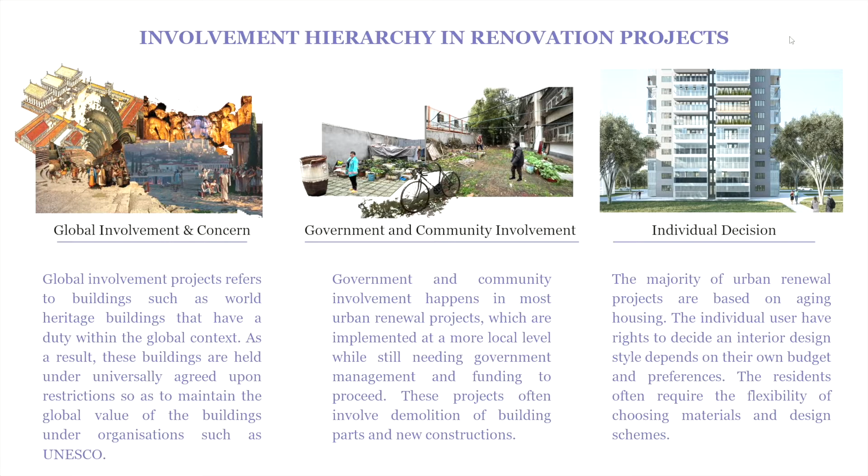This brings us to a toolkit that addresses the need of revitalizing world heritage communal spaces. These are world heritage buildings that are slowly diminishing and losing their indigenous community and cultures. In addition, the sound ambience of these world heritage communal sites is also slowly being stripped away from these buildings.

To address this, the toolkit sets out to reprogram underutilized or undervalued spaces of the building to serve as vibrant communal spaces. This is addressed through options 1, 2, and 3.

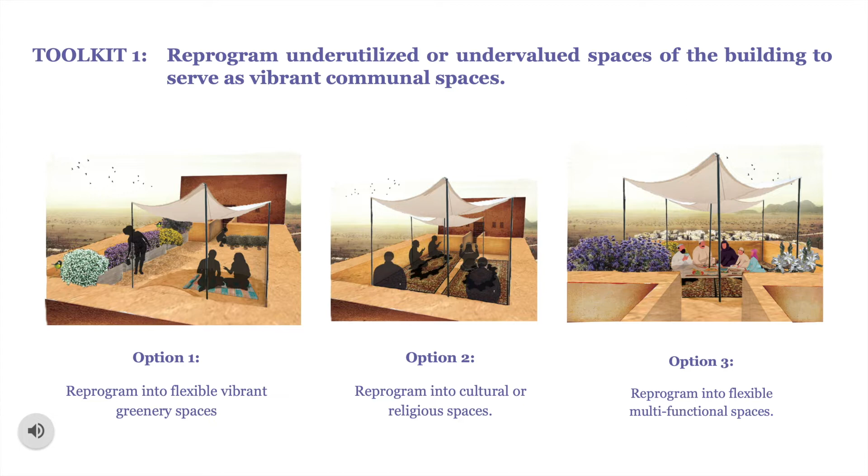In option 1, the toolkit sets out to reprogram underutilized spaces into flexible, vibrant greenery spaces in which occupants have expression of arrangement through potted gardens. This is explored through the case study of the Alwi Bin Sumayt house.

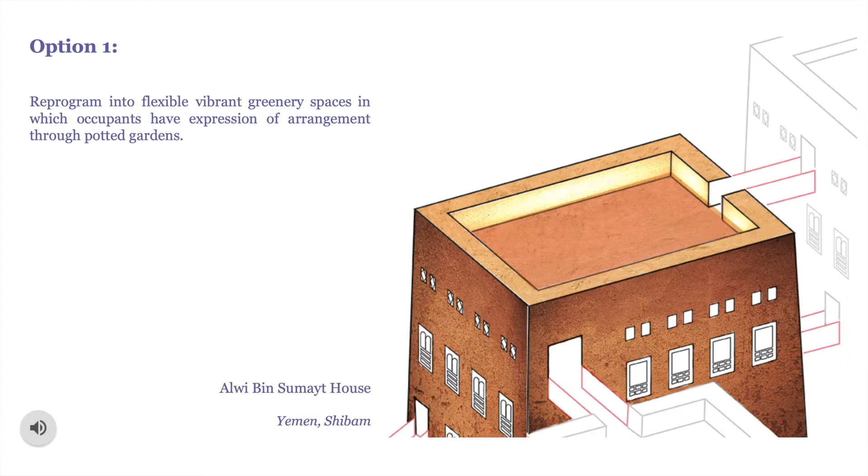The Alwi Bin Sumayt House is a walk-up residential building in an Islamic community of Shibam, a 1,700-year-old world heritage city in Yemen.

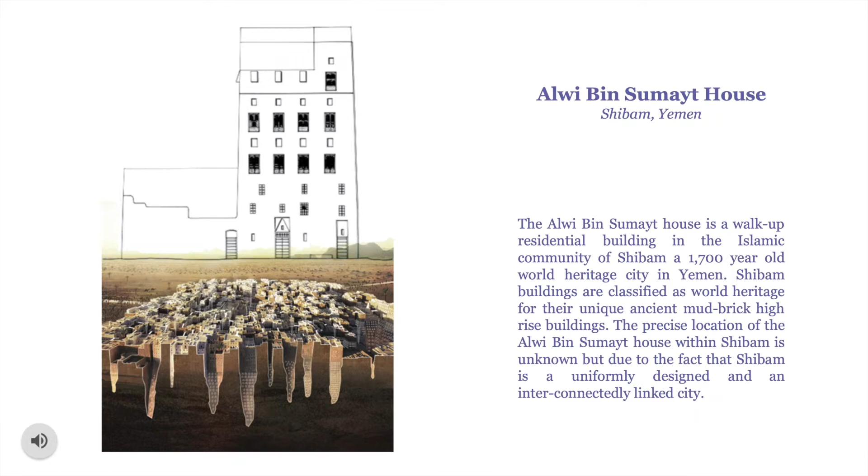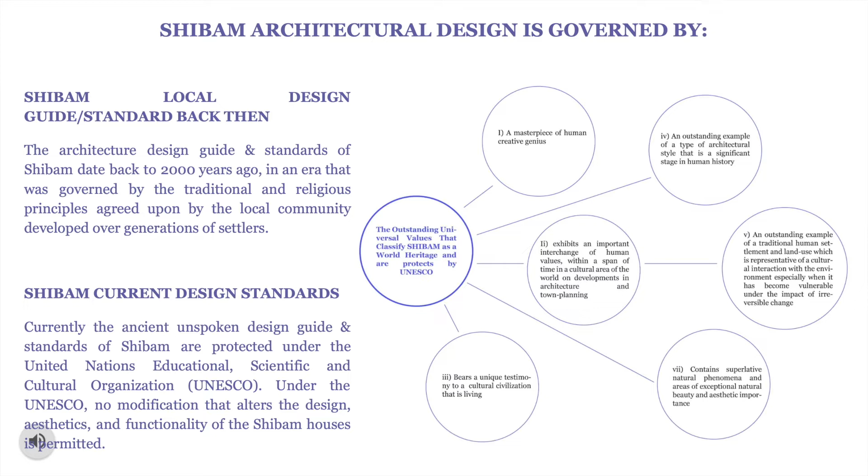The Shibam city is governed by Shibam local design guidelines that date back 2,000 years, in line with current Shibam design standards that work consistently with UNESCO to preserve the unique mud brick architecture of the buildings within Shibam. Among these is the Alwi Bin Sumayt House.

The heritage mud brick construction of the Alwi Bin Sumayt house provides good thermal behavior, good fire resistance, good soundproofing, and is built with a wider base to provide good building stability.

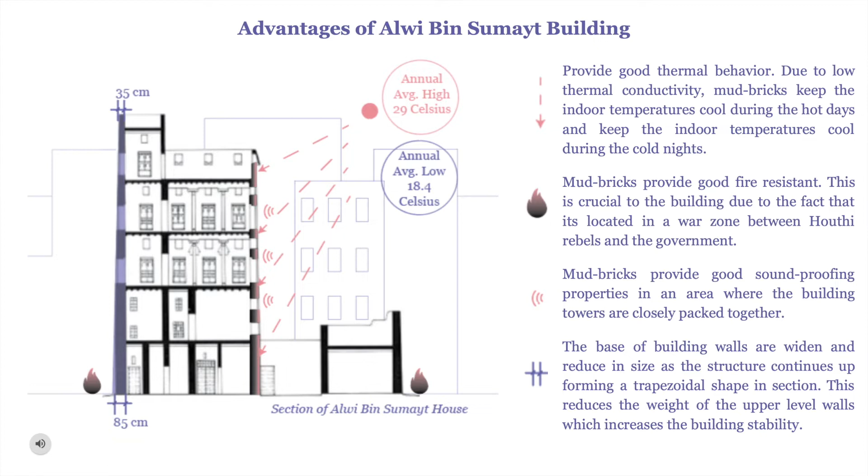The Shibam community is known for its celebrations and activities uniquely carried out on the ground with no furniture, its reliance on groundwater from the qanats surrounding the city, and its maintenance of the earthen architecture, passed on from generation to generation.

However, these have been threatened by the introduction of modern society job opportunities and modern products, such as toilets. As a result, the indigenous community is slowly neglecting the heritage cultures and values that have preserved this unique architecture and community for 1,700 years.

Hence, it's proposed that there be a preservation of the indigenous community engagements that will highlight the town's heritage value to the custodians. This is why it is proposed that this case study undertake the toolkit to revitalize the world heritage communal spaces.

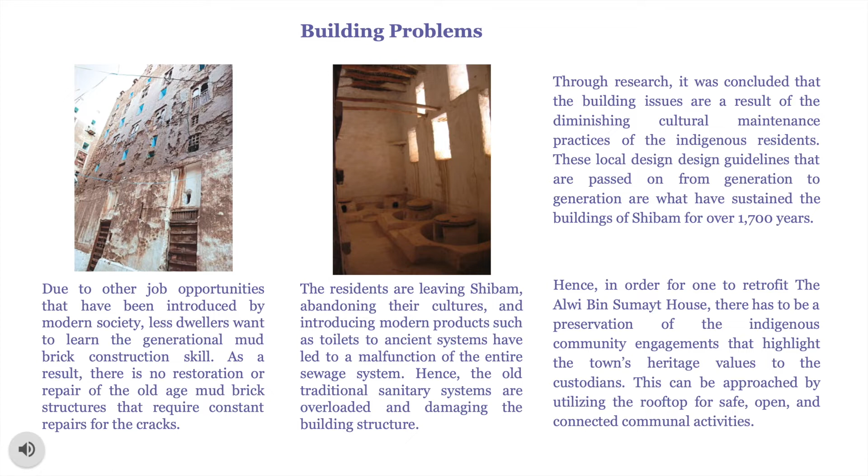To carry out option 1, reprogramming the space into flexible, vibrant greenery spaces in which occupants have expression of arrangement through potted gardens, one has to identify underutilized or undervalued spaces within or around the building.

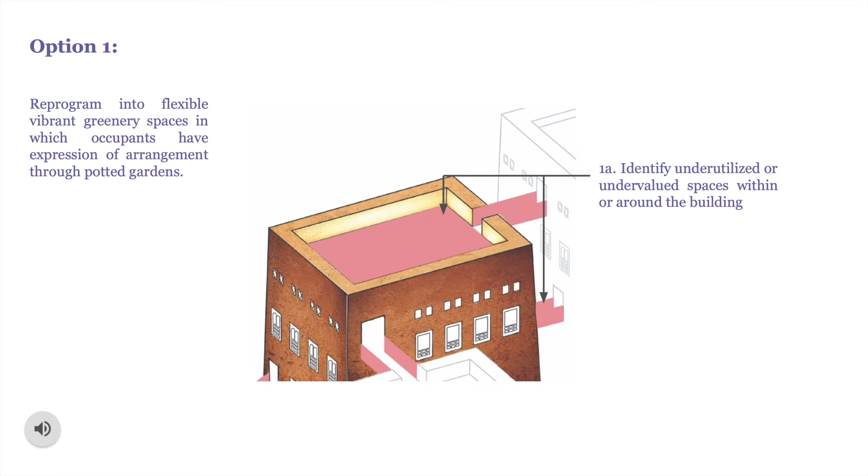Then incorporate planters that can easily be accessed and maintained within the local community. These have to be lightweight so as not to damage the heritage structures.

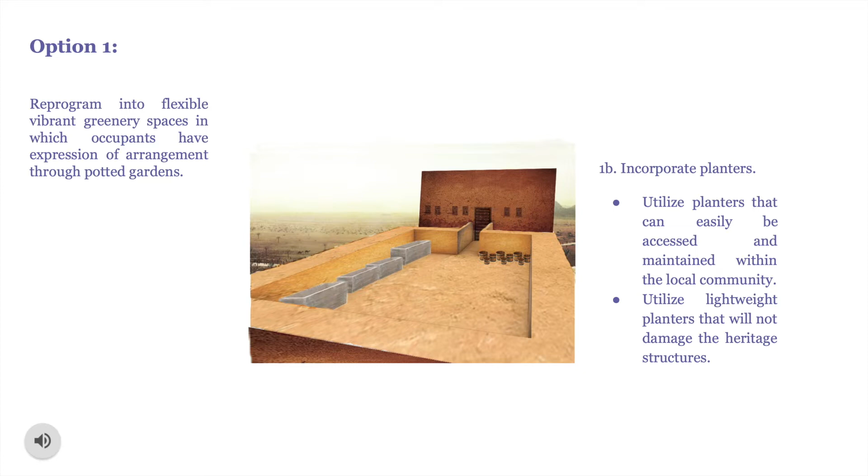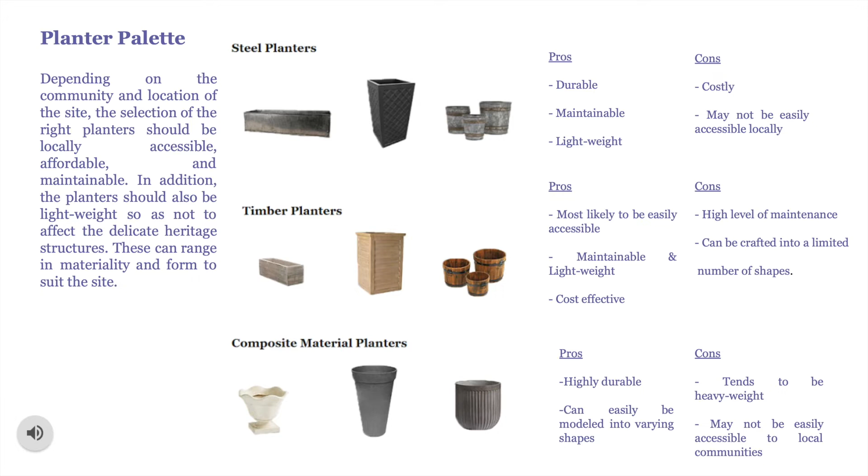The planters can range from steel, timber, to composite material planters, and these each provide their own pros and cons, which are to be carefully evaluated as to which will best suit the current heritage site.

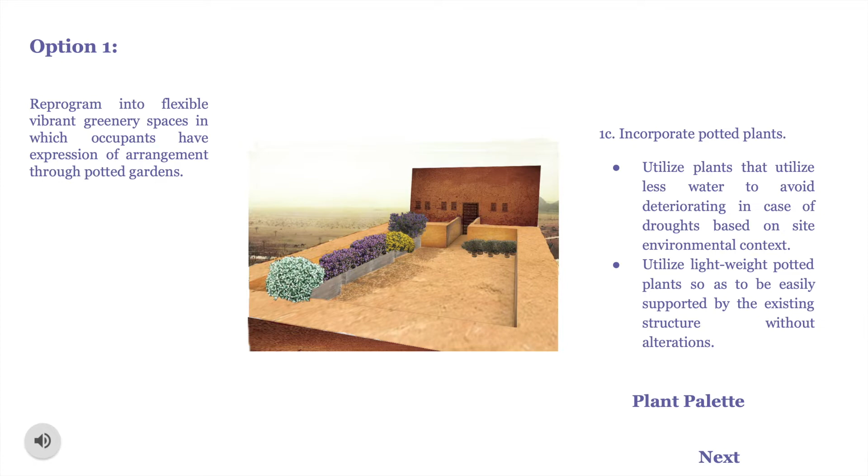Plants are then to be carefully selected to be placed in the planters. These should be lightweight so as not to damage the structure, but are to be carefully selected based on the climate in which they can easily be sustained. The plant palette ranges from dry climate plants, temperate climate plants, to tropical climate plants.

After incorporating plants, one can then select the right urban furniture that will cater to the activities that will take place in this communal site.

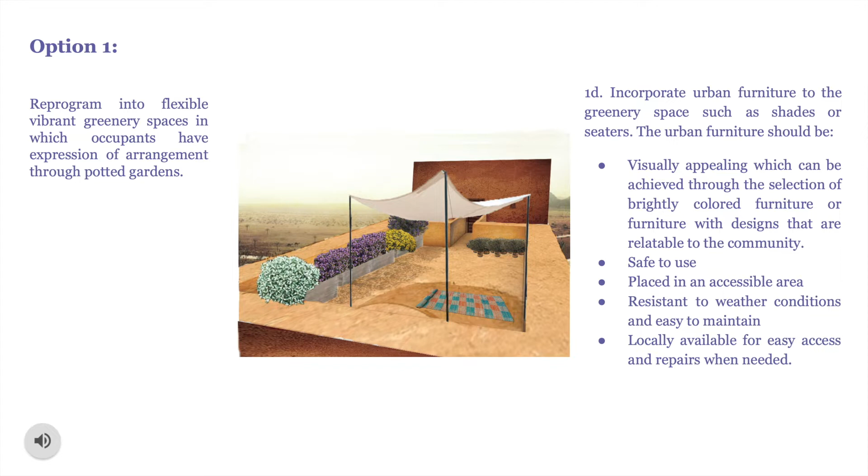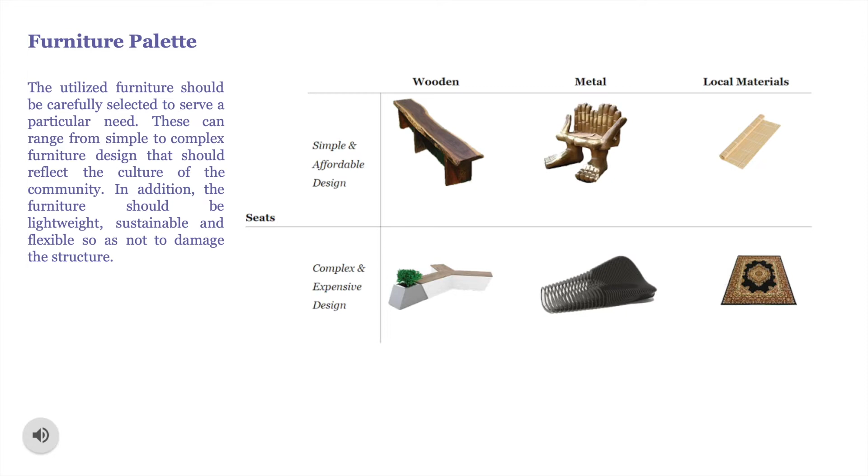The urban furniture can range in materiality and design, from simple and affordable to complex and expensive designs. This urban furniture can be seats, tables, or shades. This will transform the space into a vibrant greenery space in which occupants can enjoy a freedom of expression through potted gardens.

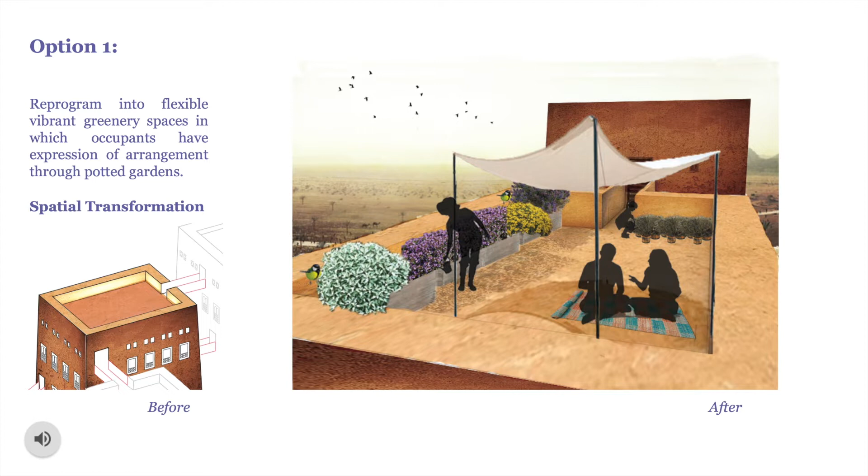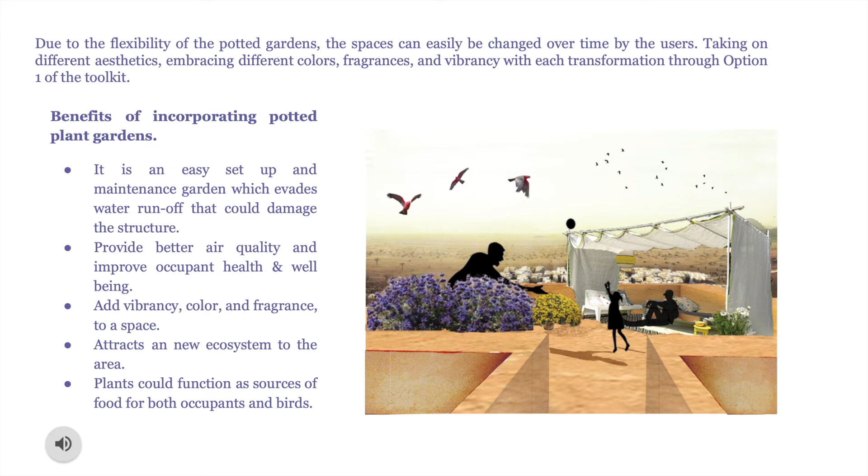The flexibility of potted gardens can enable the space to easily be changed over time, taking on different aesthetics, embracing different colors, fragrance, and vibrancy over time with each transformation.

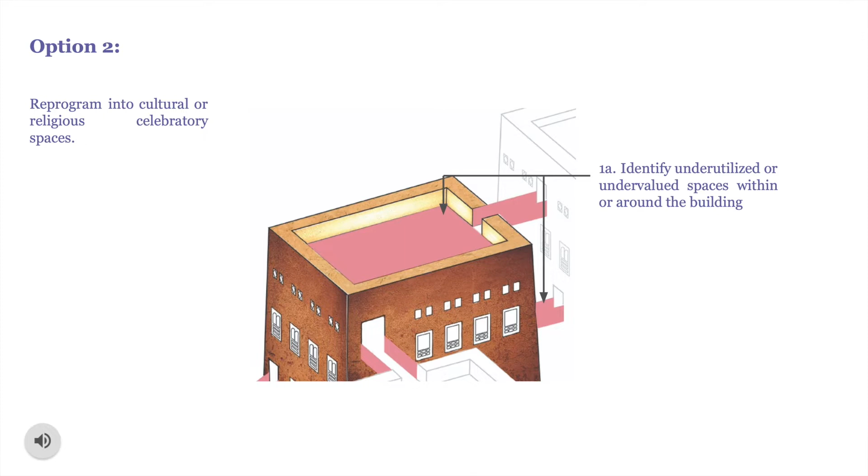Option 2 of the toolkit proposes to reprogram underutilized or undervalued spaces within or around the building into cultural or religious celebratory spaces. After identifying the undervalued or underutilized space, one is to provide it with lightweight, easy to set up shades or furniture that will cater to the religious or cultural activities that should occur there, as required. Refer to the furniture palette introduced earlier for more details on which furniture to use.

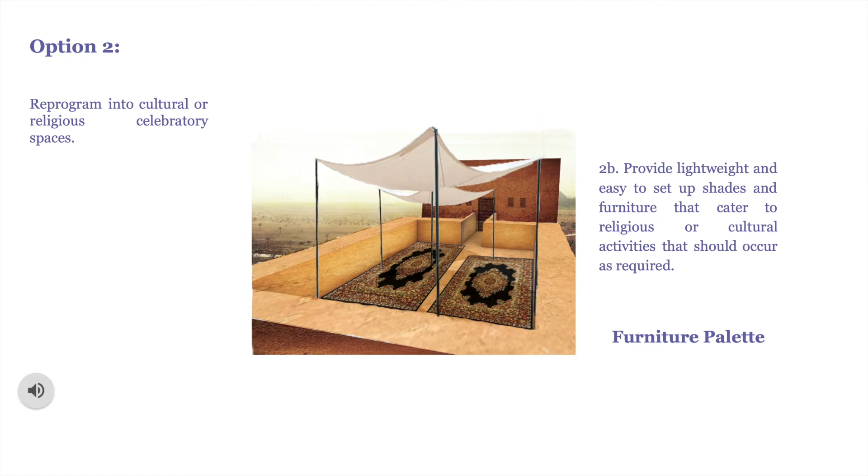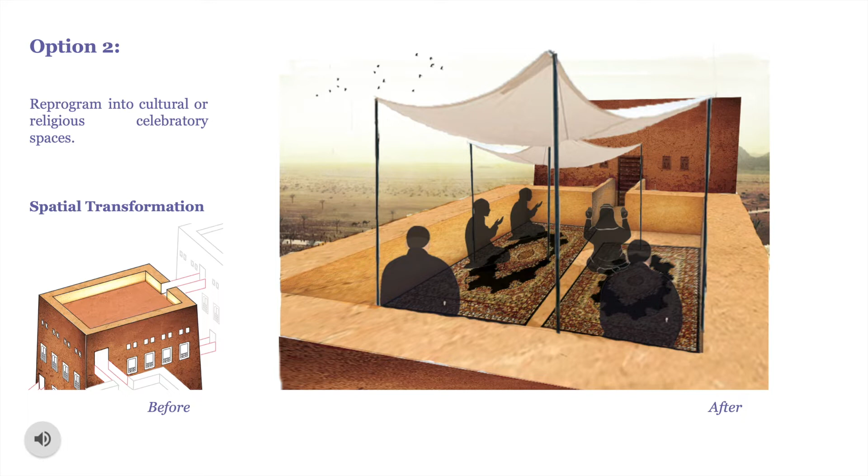Option 2 of the toolkit will transform the space into a holy religious space that is culturally significant to the occupants and the community. Due to the flexibility of the furniture, the spaces can easily be changed over time to cater to the different prayers or cultural celebrations whenever they need to happen.

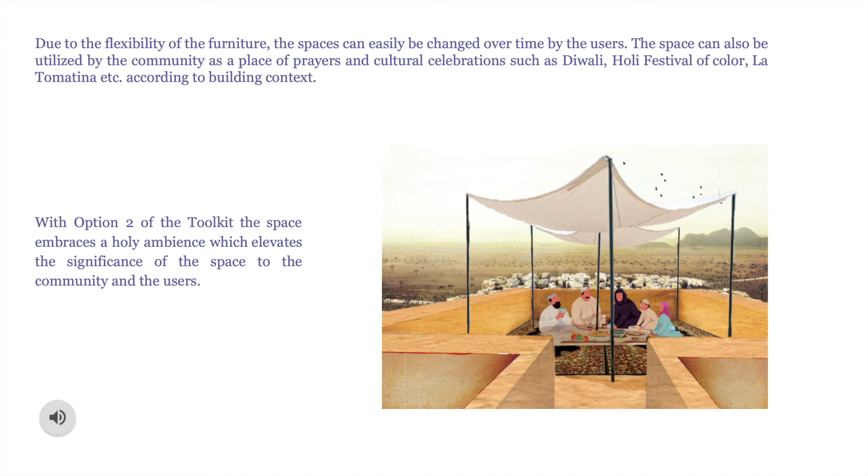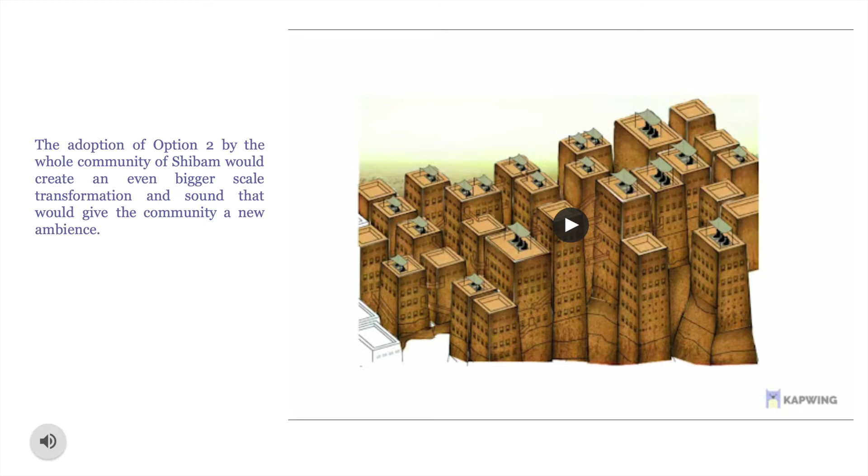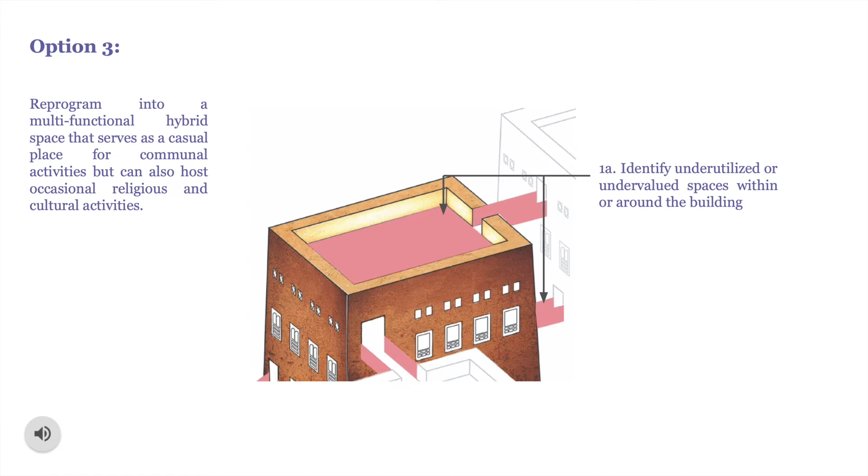Option 3 of the toolkit proposes to reprogram the underutilized or undervalued spaces within or around the building into a multifunctional hybrid space that serves as a casual place for communal activities but can also host occasional religious and cultural activities. This would be a merge of option 1 and option 2, making the space multi-purpose in accommodating varying activities.

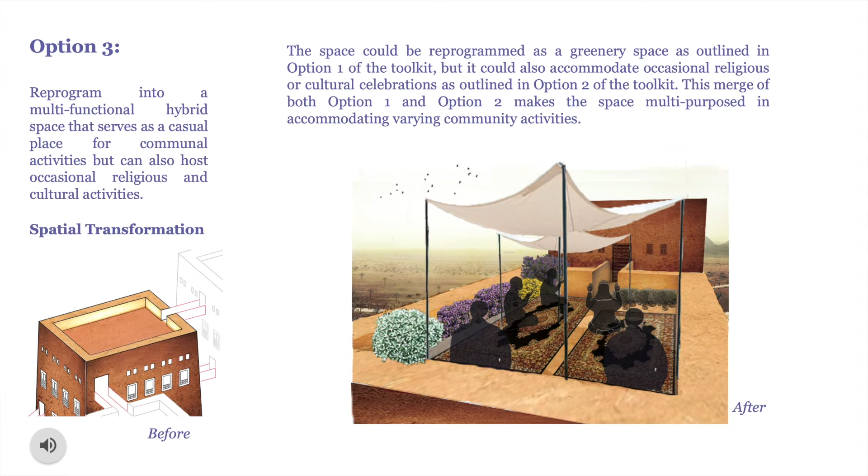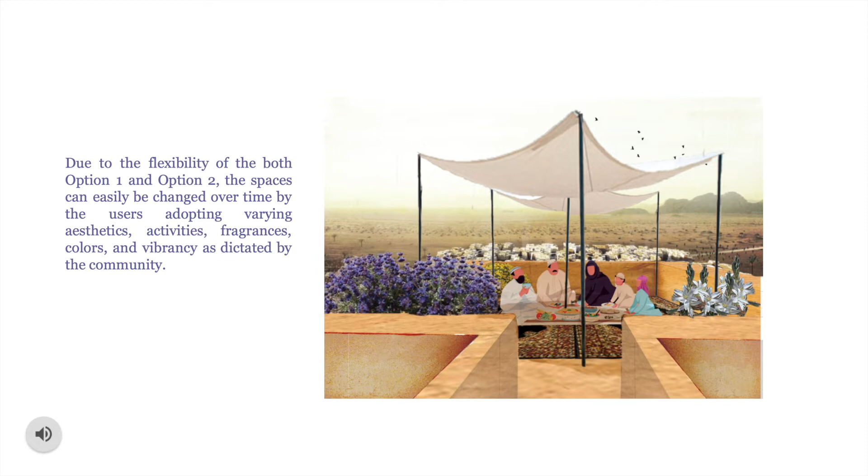Thus the space could be a greenery space but could also function as a holy place of prayer. Due to the flexibility of both option 1 and option 2, the spaces can easily be changed over time by the users, adopting varying aesthetics, activities, fragrances, color, and vibrance as dictated by the community.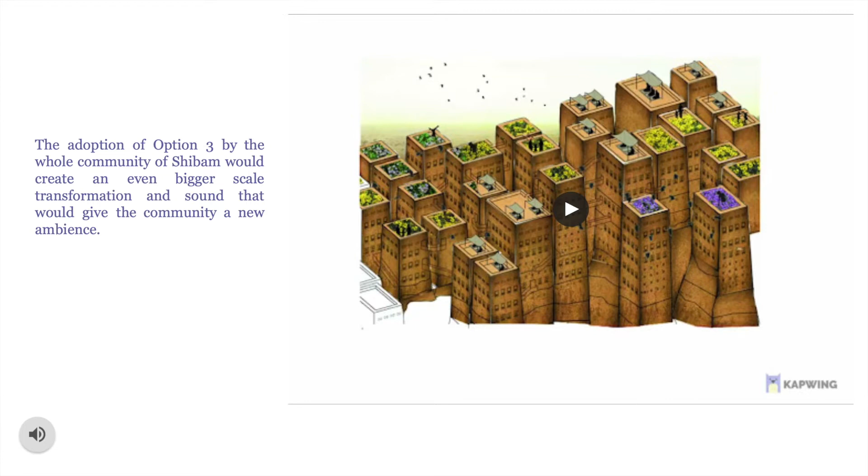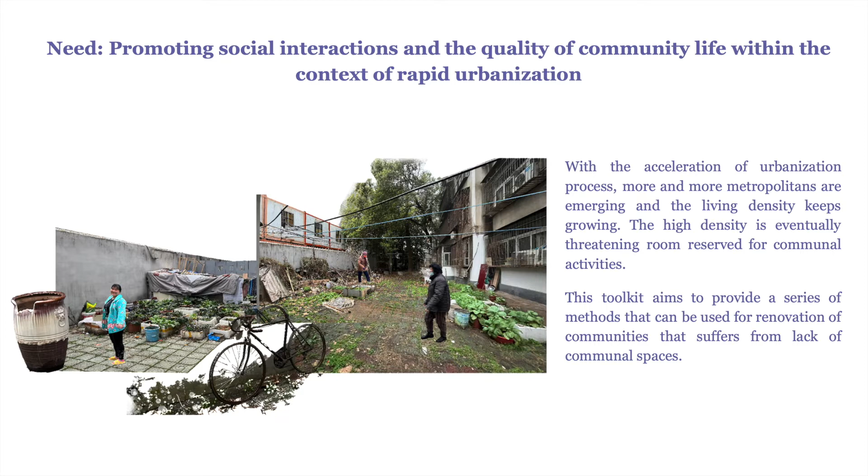For the community involvement projects, the aim is to promote the living quality of the local community. As a result of urbanization, the growing density of residential communities is leading to a lack of communal spaces in some old residential buildings. This brings the toolkit for creating communal spaces.

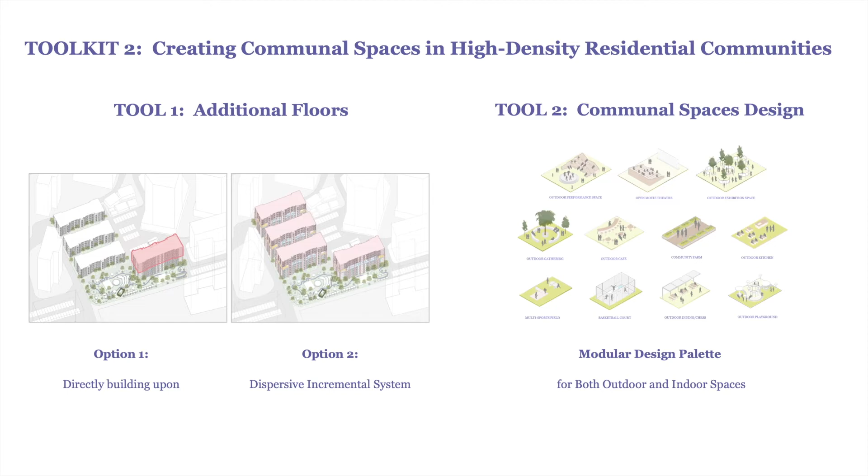The toolkit is divided into 2 steps: first is creating room for communal activities, and second is a modular communal space design. This toolkit is explored through the case study of East Xiaohongshan community in Wuhan, China.

Built as a colleagues' community in the 1990s, it was once national property and has later been through the national privatizing housing reform. Now the demographics have changed over time, and as new office buildings rise next to it, the original basketball court, which was the only space for communal gathering, was taken over for car parking.

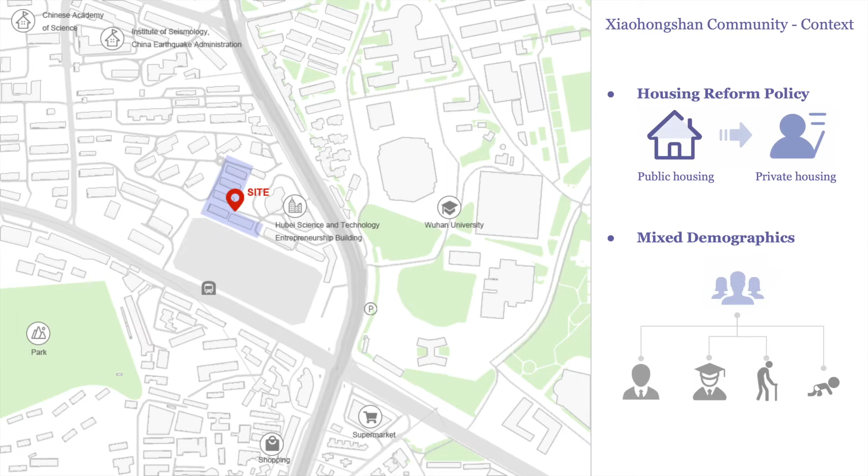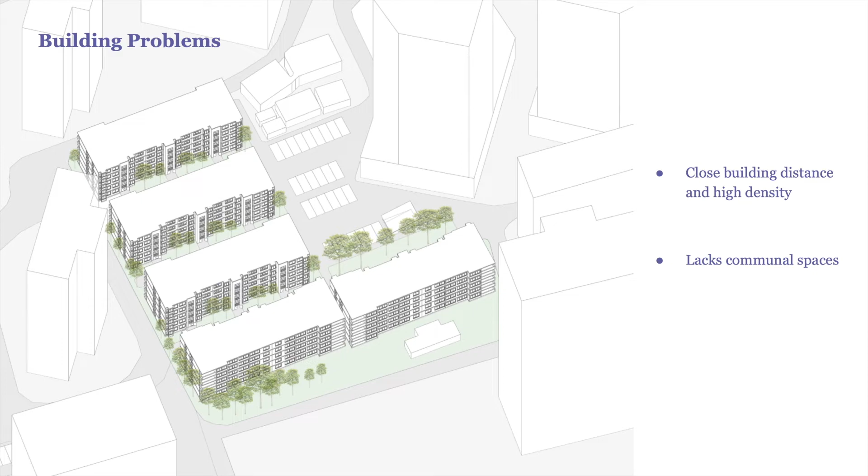The high density, fast-changing demographics, and lack of proper communal spaces and services are causing a quiet, dull community life with little or no interaction between people.

The first tool explores the possibility of releasing more ground floor spaces by demolishing some of the building blocks and rebuilding them on top of others as additional floors.

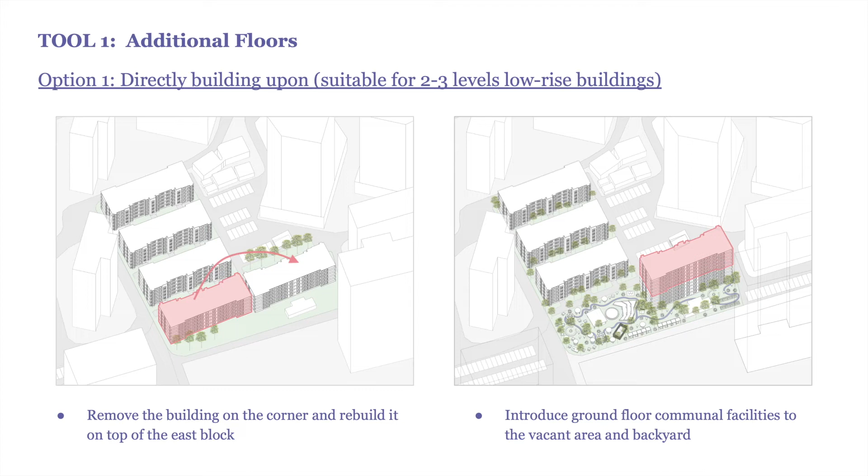The first option is to directly build the building block on top of another. This is only viable for 2 to 3 level low-rise buildings using lightweight materials. The second option is a dispersive incremental system, which is suitable for higher blocks to disperse the load.

The incremental system builds additional structures to hold the additional floors, reserving 1 to 2 levels in between for indoor communal activities. The new structures are fixed to the existing facade for horizontal stability, and the in-between spaces can be open-plan, flexible indoor communal spaces.

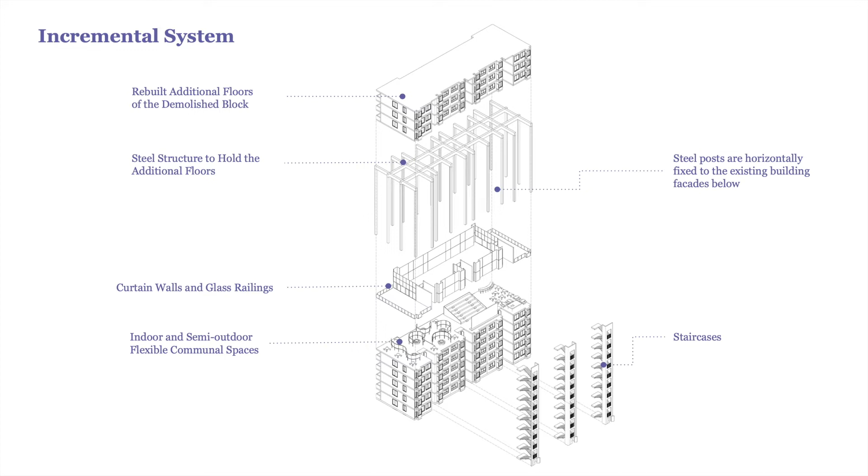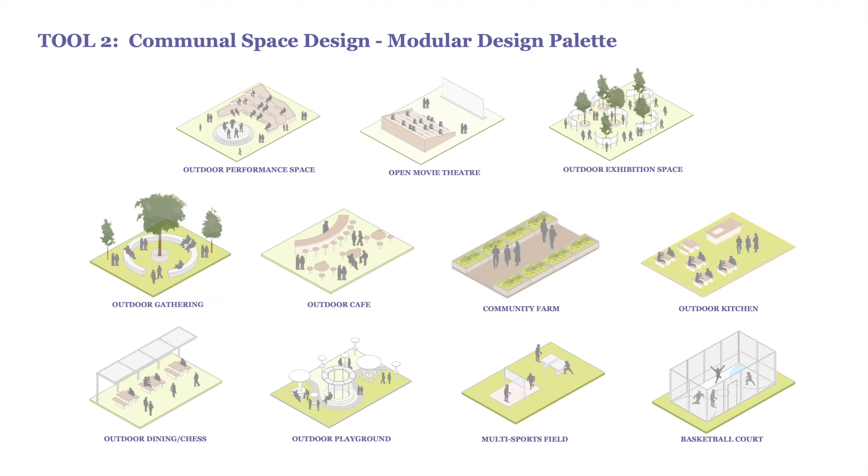The second tool explores the modular design of communal functions and activities in both outdoor and indoor contexts. These include functions such as gathering, dining, sports, exhibitions, movie theaters, outdoor shading facilities, etc. With these facilities, the outdoor community will be more engaging and vibrant, like this.

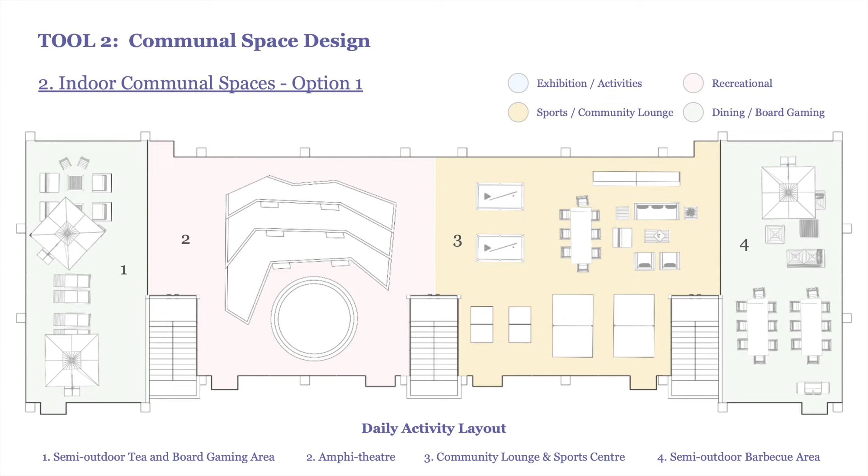For the indoor communal spaces created by the incremental system, the flexibility of layout is maximized. Two options are provided: one is the daily activity layout with a community lounge and recreational areas such as a sports center and board game tables; the other is an occasional activity layout for bigger activities such as exhibitions and movie nights.

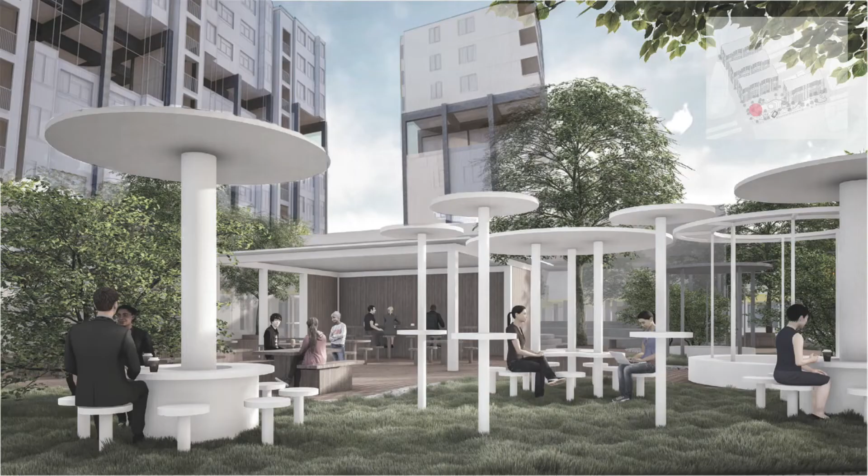The indoor communal spaces can be more protective and relaxing, and more attractive for residents, something like this.

Having provided the toolkit, the problem is how can we implement a renovation at this level? Who is involved and who can make this happen? There is always a mix of top-down and bottom-up process, starting from the state policy and funding.

And then there needs to be a local guide for renovation projects, which is then informed by the community management sectors to the individuals. Once the community as a whole reaches consent, the architects and planners are involved to provide schemes and finally submit application for approval and funding.

As for the renovation guidelines, taking the Wuhan guidelines for example, the government needs to first specify the project scope. For instance, all residential buildings built by the year of 2000. Second, different projects can be categorized according to different levels of needs, ranging from basic to improvement and finally enriching.

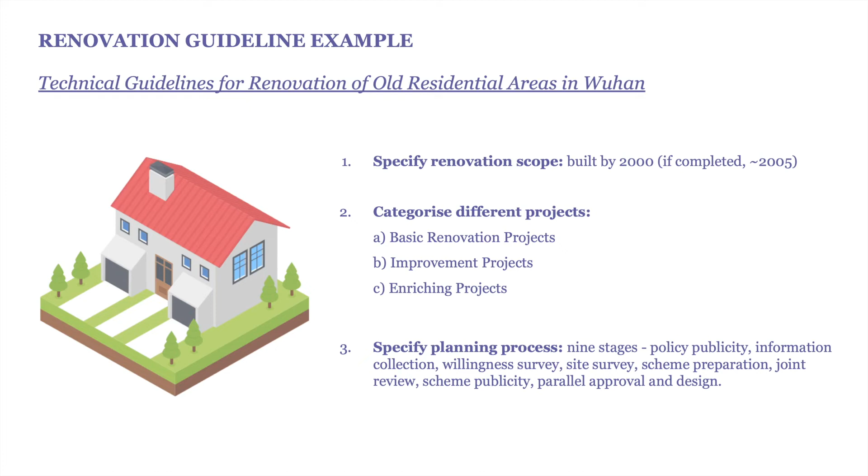And third, the process of implementation should be specified in detail. Once these guidelines are set, renovations at a community level like this one will be more feasible and comprehensible. In this toolkit, it provides different options for home balcony designs.

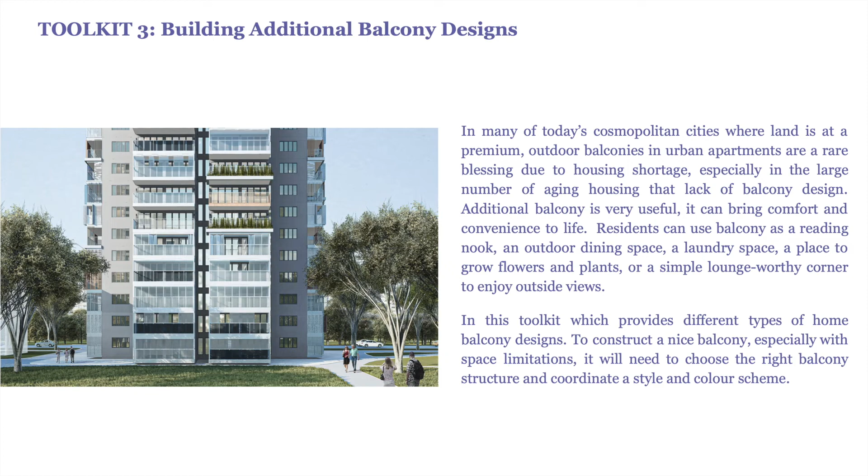Outdoor balconies in urban apartments are a rare blessing due to housing shortage, especially in the aging housing that lacks balcony design. There are 3 balcony options provided. Option 1: hung balcony structure has low deformation and it also has no load concentration.

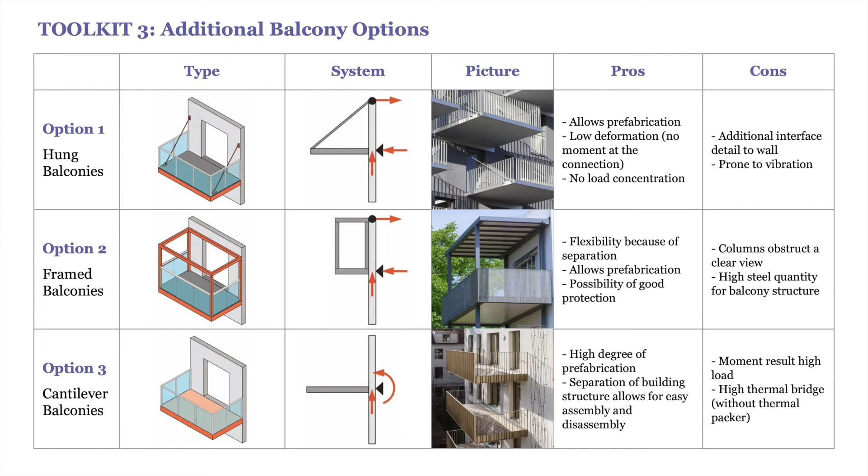Option 2: framed balcony has high level of flexibility because of separation that can provide possibility of good protection. Option 3: cantilever balcony provides high degree of prefabrication and is easy for assembly. There are different material options for hung balcony.

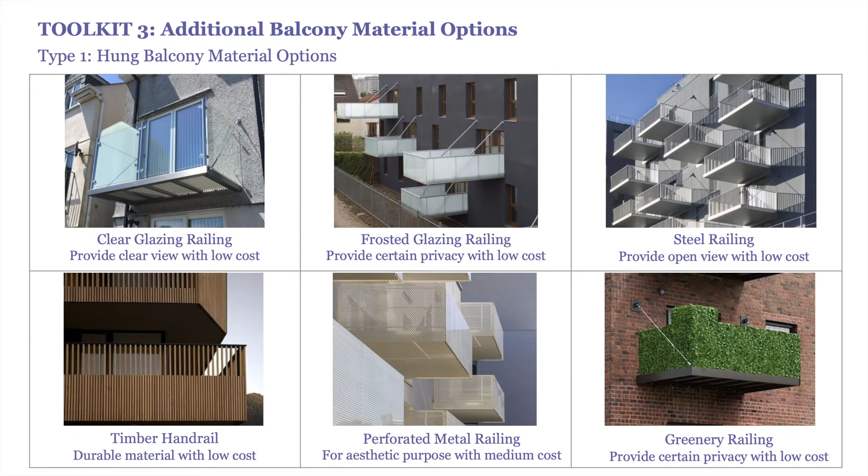It can use clear glazing, frosted glazing, steel, timber, perforated metal panel, and greenery. The option depends on the needs of privacy, views, costs, and aesthetics. For frame balcony, it provides a wide range of good protection because it can be constructed as open or enclosed balcony. The material options are steel, clear glazing, frosted glazing, metal mesh, folding doors, and timber weatherboard.

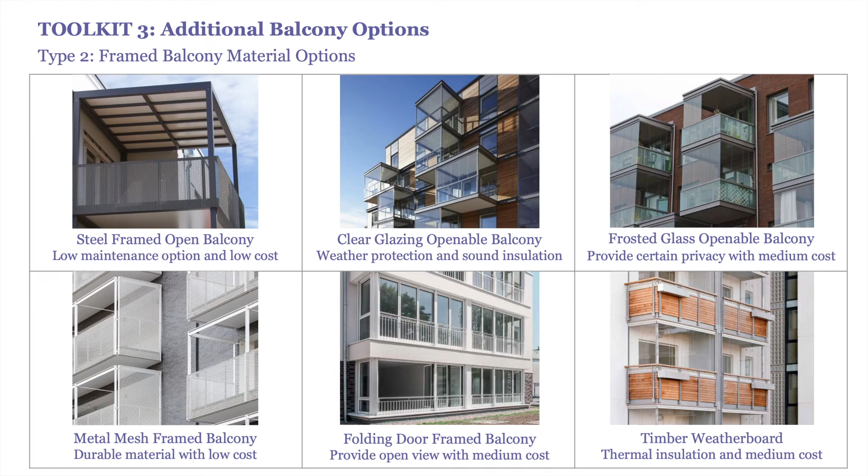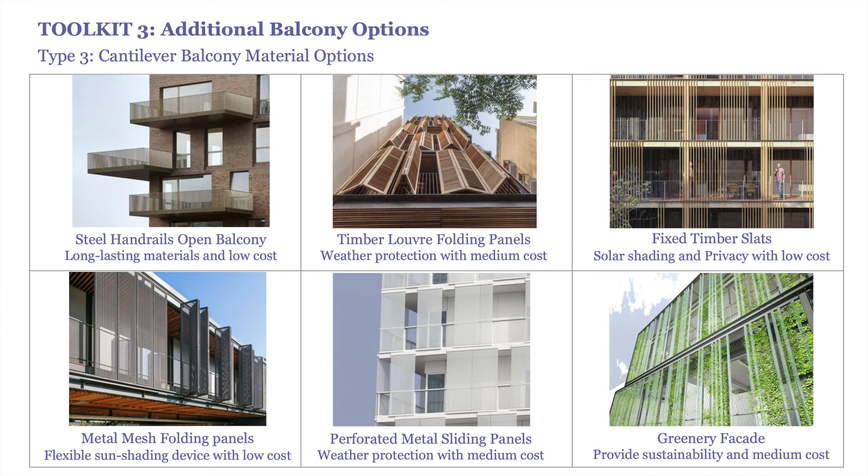For cantilever balcony, the material options are steel, timber louver folding panels, fixed timber slats, metal mesh folding panels, perforated metal sliding panels, and greenery panels. It is great for west and east facing balconies which require solar protection.

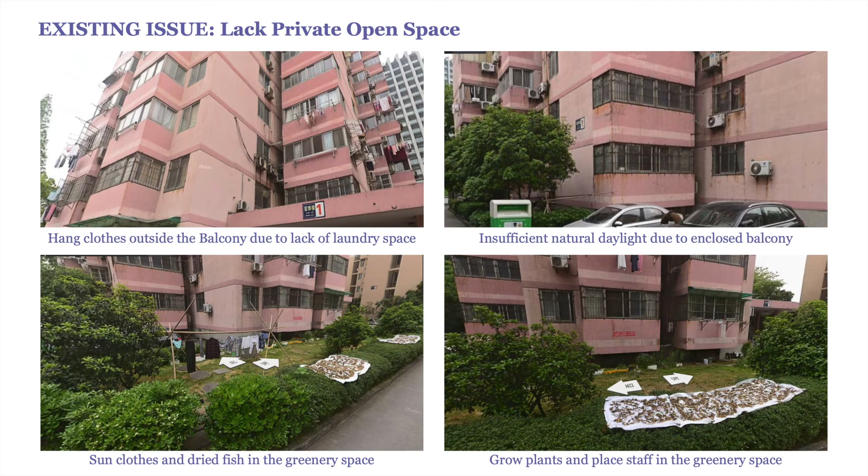The case study is a teacher's apartment located in Hangzhou, China. It is a 23-story concrete frame tower built in 1995. The issue is that the existing flats lack private outdoor space. The residents have to hang clothes outside the balcony and even grow plants and place their stuff in the greenery space. The existing balcony is only 1.1 meter wide, and it did not comply with the local guide standards.

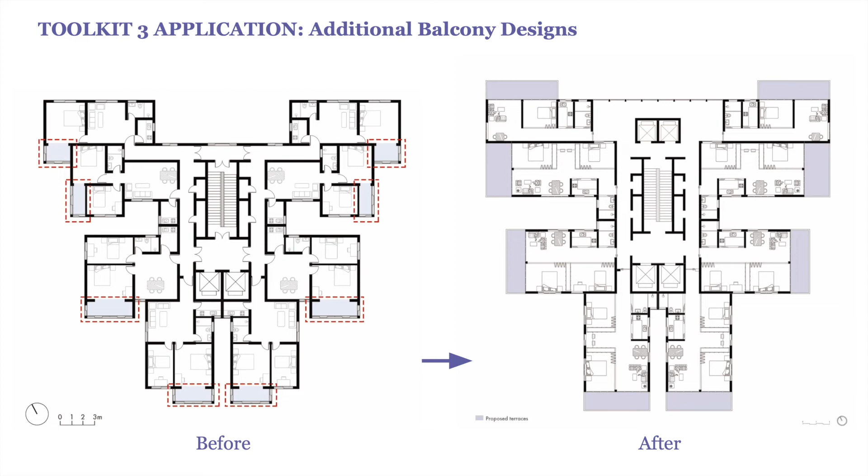In order to add private open space, the design strategy is to demolish the existing enclosed balconies and build new balconies 2 meters wide. From the toolkit, there are 6 open balcony options and 4 enclosed balcony options designed for the north and south facing balconies, since they require sufficient natural daylight and ventilation.

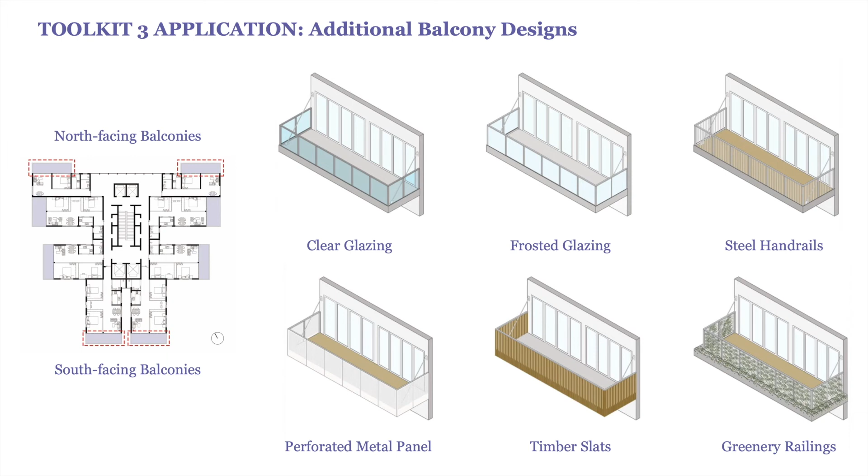There are 6 open balcony options. There are 4 enclosed steel frame balcony material options, which offer a wide range of opening options: opening inwards, folding to the left or right, or fold to the side.

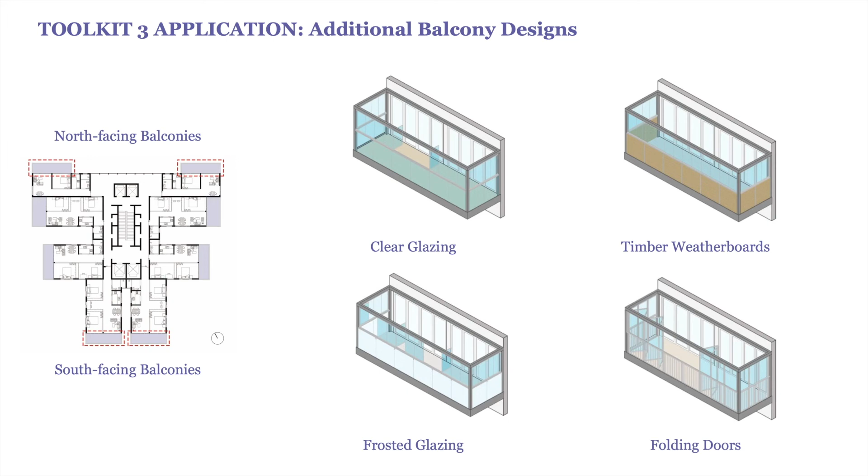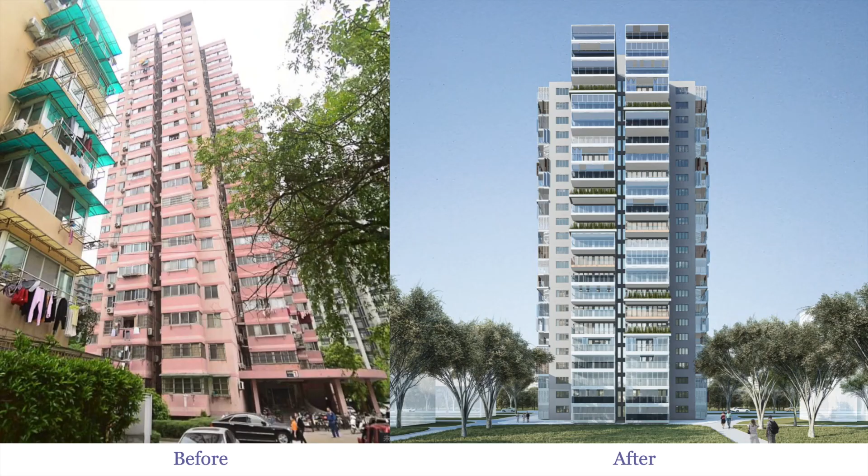For the west and east facing balconies, which require sun shading, there are 6 balcony options that are operable panels, sliding panels, fixed slats, folding panels, and greenery panels. These are south-facing balconies renewal design before and after images. The renewal balcony design allows diversity of balcony structures, materials, and styles.

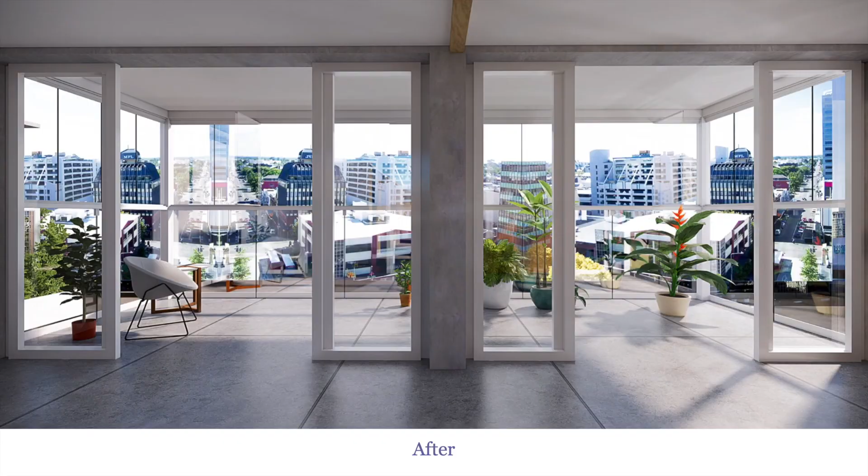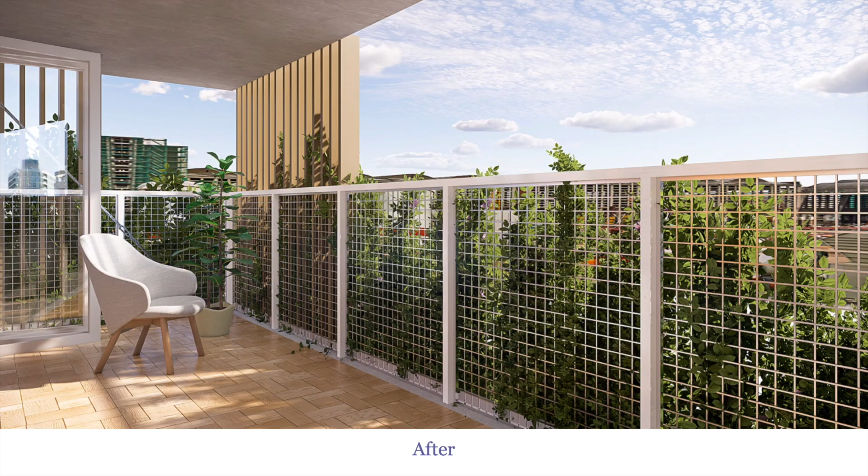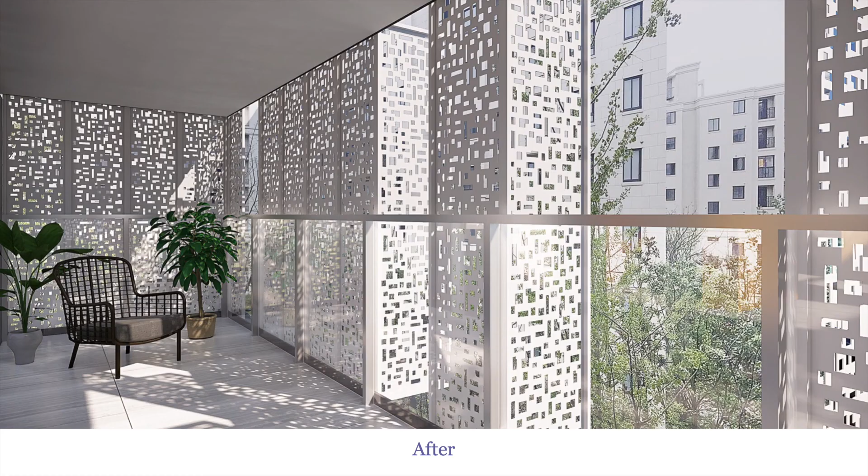This shows another design option, the cantilever balcony with fixed timber slats, and the mesh handrails allow residents to grow flowers and plants. The operable perforated steel panels allow flexible solar control and provide a certain privacy. Residents can use the balcony as an extra living space to enjoy outside views. This is our 3 toolkits related to involvement hierarchy in renovation projects.